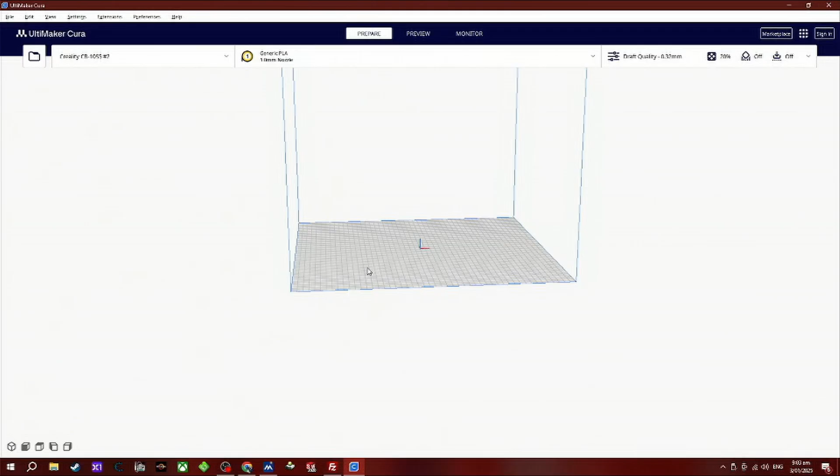So load up Ultimaker Cura. If you use the center mouse button or the scroll button, you can zoom in and out. If you hold down the left button, you can change the view or drag it. So first we're going to import one of our STL files that we had saved, or one of our parts. I'm going to drop in the left side for now.

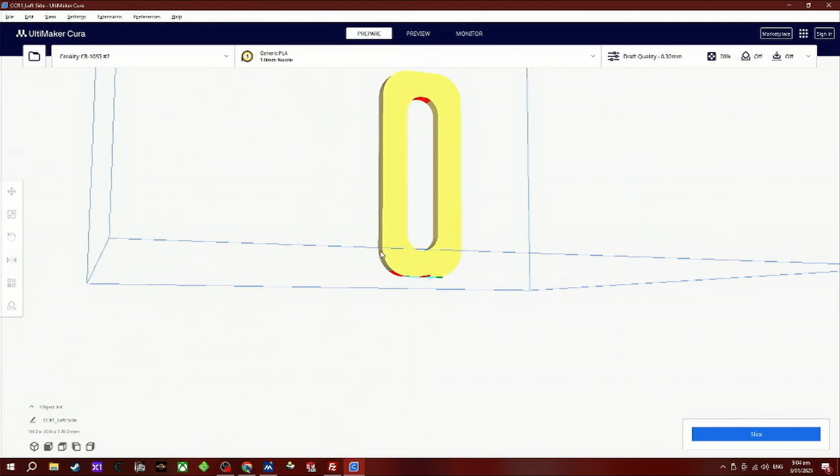So if you click on the object, usually if there's only one thing going in there, it will center it for you. If you click on it on the left hand side, you can see this has come up. This here shows you where it is on the grid or on the heated bed. If I change the numbers, you can see the object will move. This is in the plus.

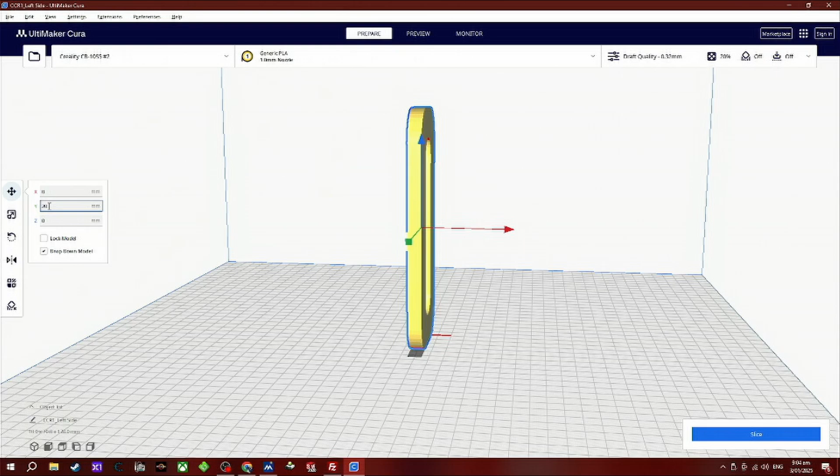If I was to add negative and then put the number after it, like let's just say minus 20, it'll move the other way. Or you can just grab the arrows that you can see there, the X, Y and Z, the red, green and blue ones. Click on the left mouse button and hold it and lift it up, or move it left or right.

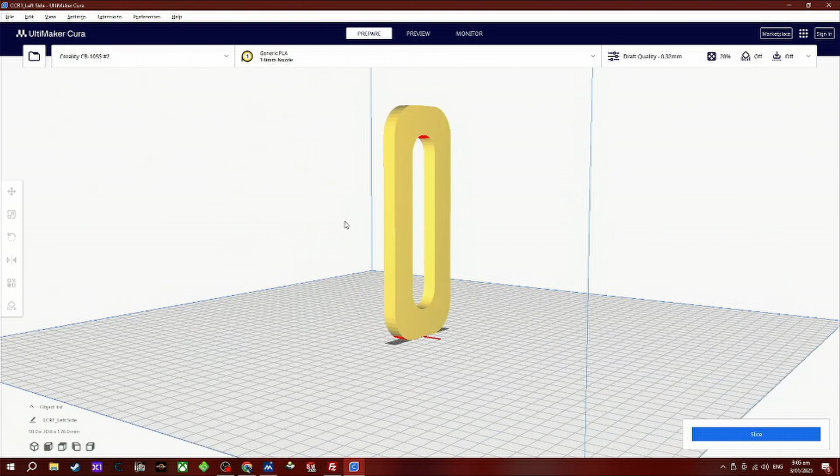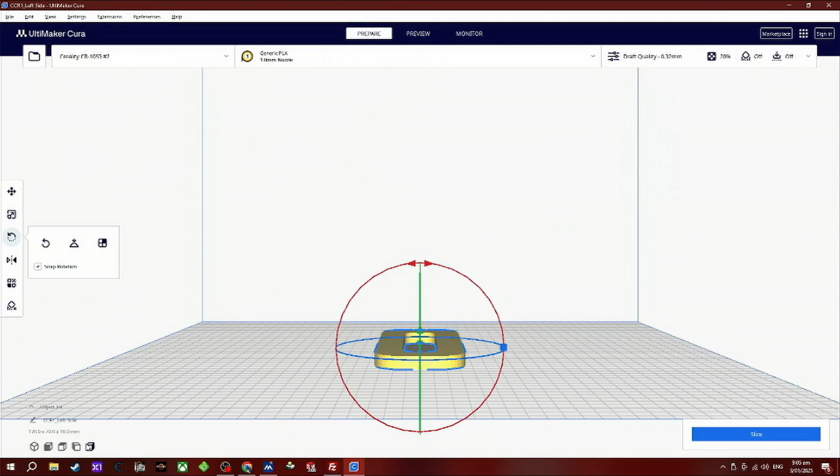So this third one here, you can actually manipulate the object and turn it, as you can see there. So same thing, just click on it and hold it and move it around to your desired angle. You can use this to change the camera, so you've got front view, top view, and then you've got the left and then the right sides. I'm going to click on the top view, and you can see I can move it.

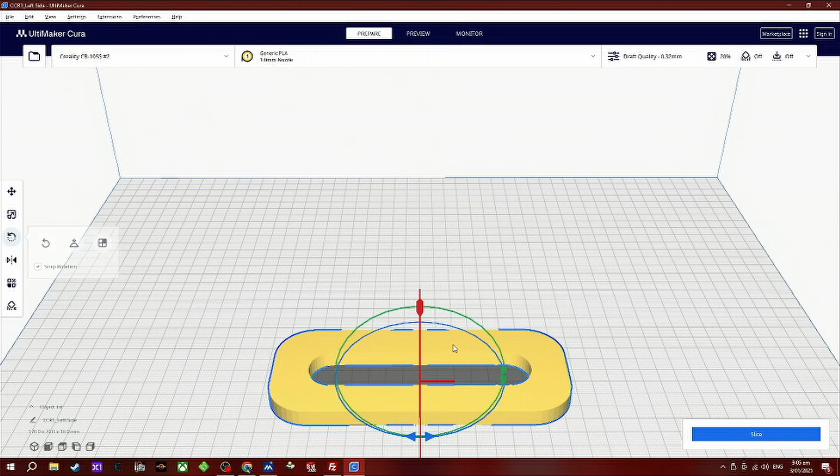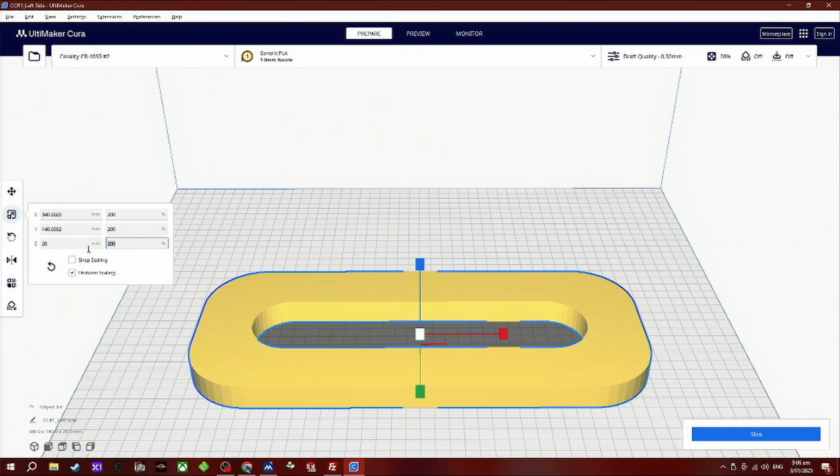If you click off the object, it removes that panel. So now I'm going to click on it again. I'm going to go to the second one. The second one is the scale, or the size, the height, width and all that. If you want to double this, just leave the settings as they are. Now I'm going to double it in size, make it 200, and it will move accordingly. If you untick that, it will obviously only increase the Z height, and it will leave everything else the same.

If you want to change the nozzle diameter or the material, you can go here. I'm printing in PLA at the moment. So go in there to change the nozzle diameter. I'm not going to change it because this is what I'm going to be printing in, 1.0. You can see down in the right hand corner, we're going to click on slice. You can actually set this up to do it automatically. And as you can see here, it gives you how long, what the weight is and everything else, or how many meters you're going to use.

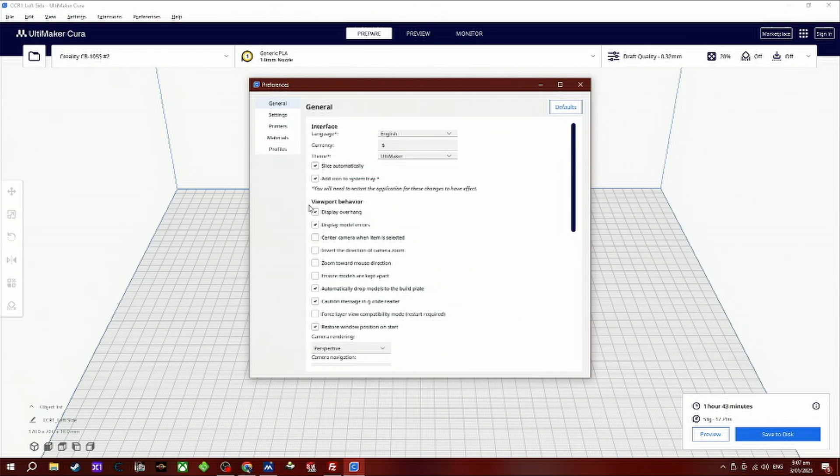This one here, we can actually select what material we're using, and also we can add in the cost per roll. So if you've got a 1 kg roll, which is somewhere around 330 meters, we can type in what we've paid, and I always put in what it costs to ship as well, so I put in the total amount. So there I put in 1000 grams, so that's 1 kg, and up there I'm going to put in the amount of what the roll cost me.

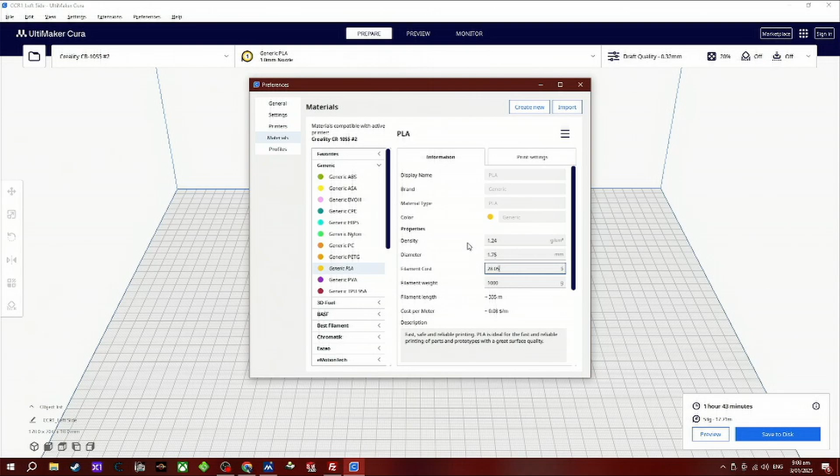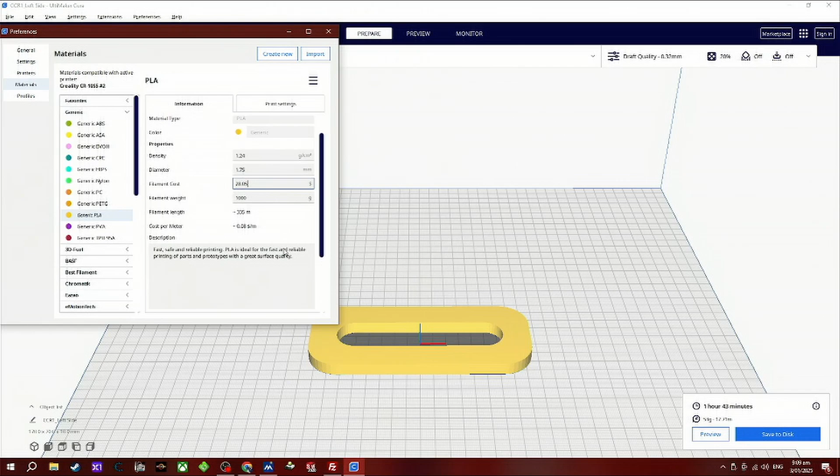Reason why this is done, let's just say if you're running a small business and you want to know the cost of each part that you are creating, this will give you a fair idea. So it just divides it up. Once you hit the X on the window there, it will pop up on the bottom right hand corner right there. So there's the cost of the part.

So here I'm going to click on this, and this will bring a drop down where we can do all the settings here. The quality, I'm just going to leave it as it is. Then we've got the walls, I'm going to leave them the same as well. I'm going to change the infill to 5%. If you were to make this 100%, this object would be one solid piece. If you make it 5%, it'll make it really, really light. That is the difference.

Next is material. I'm going to keep the hot end at 200 degrees, but the bed is going to be changed to 0 for me because my heated bed is actually independent from the printer. You will just leave this as it is, unless you have an individual heated bed that is not connected to the software or to the actual console of the printer. Now the print speed, I'm going to change that to 100.

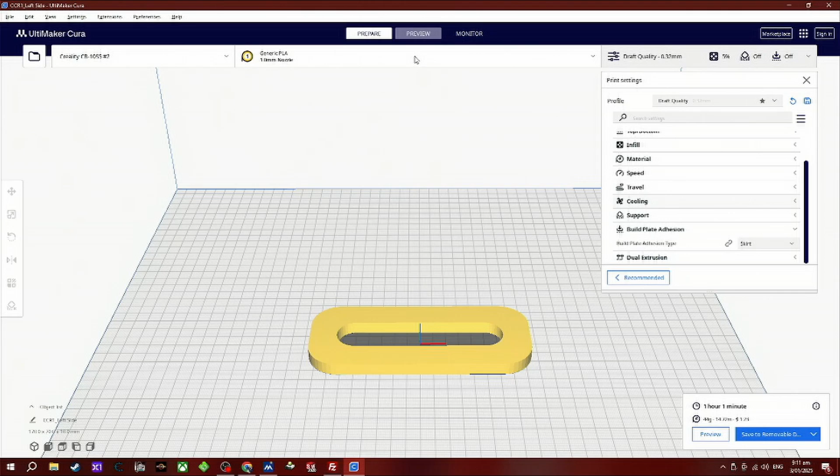Build plate adhesion, I will give you a demonstration on what this means. If you click on this here, this will show you what it will look like when it's being printed. It's more a demo. So if I zoom in on that, you can see there it has a skirt, which is a total waste of time printing. To be honest, because I've been doing this for so long, I usually either select brim or I turn it off, or have nothing at all.

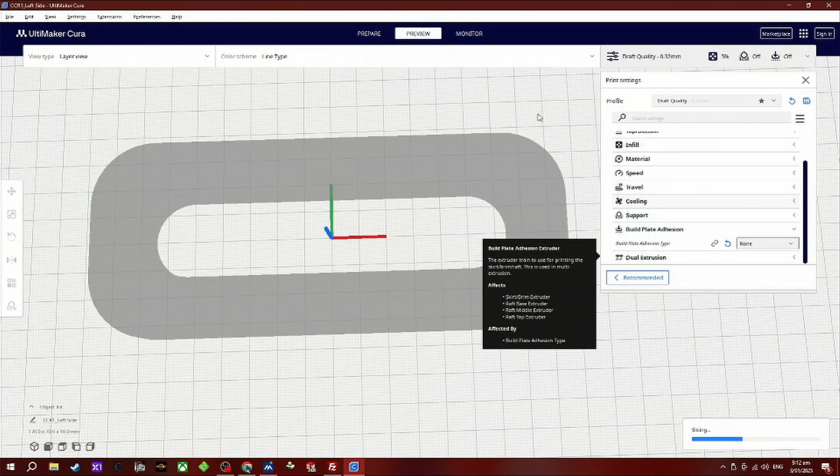So if you have it on brim, this will help the actual part stick to your build plate a lot better. It will have more grip or more space to hold on to. So you can turn it off here and just print the actual part. But there's a downfall to this: if your bed isn't level, your part's not going to stick and it will just come off. So keep that in mind.

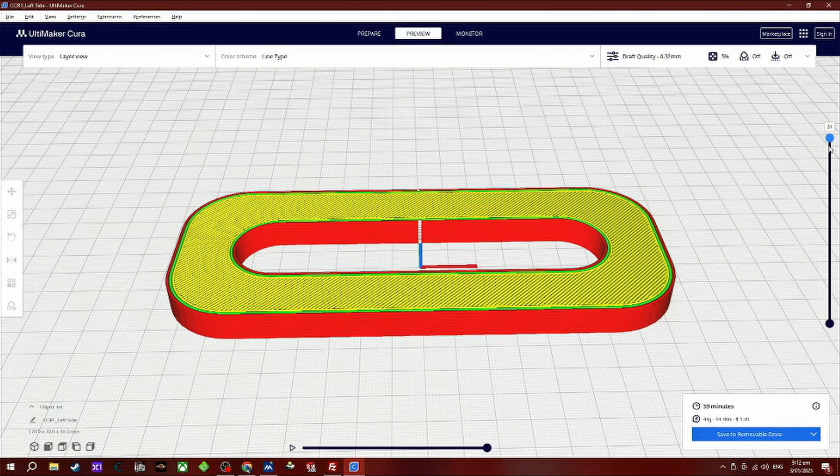Worst case scenario, one of the corners will lift and then your print will be ruined. So this setting here on the right hand side will show you how each layer is printed. You can only see this in preview mode. The one down the bottom here, if you push the play button, it will show you how or which direction the nozzle will print.

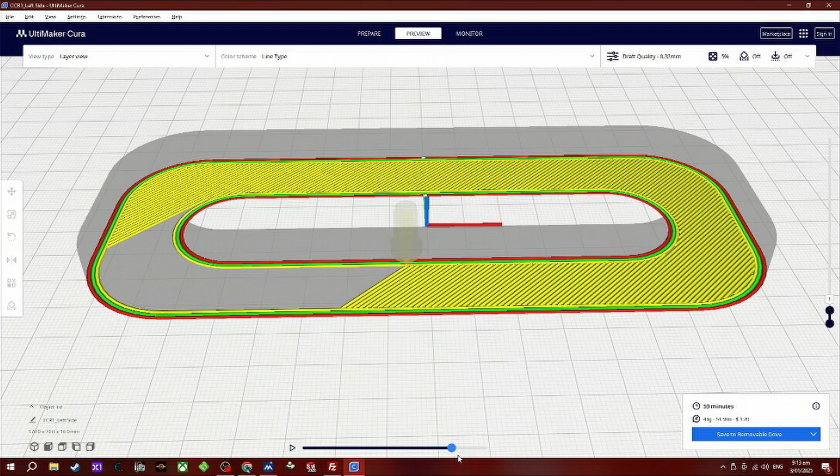If you grab the slider with your mouse and drag it over, you can fast forward it. As you can see there, you can see how it builds the first layer.

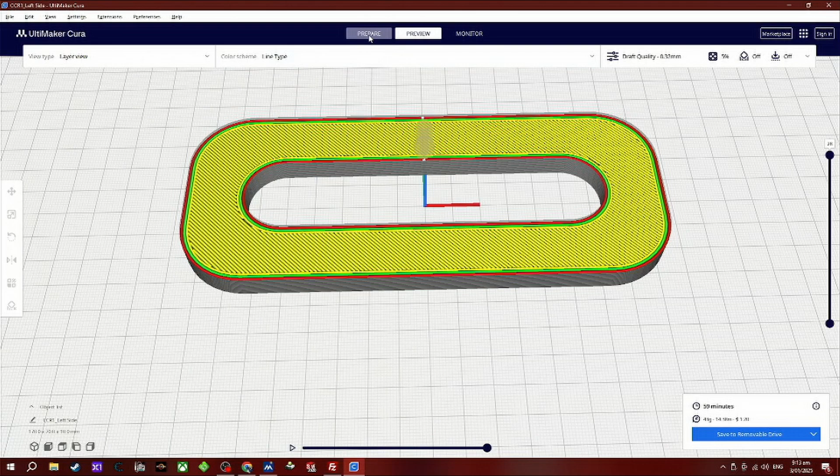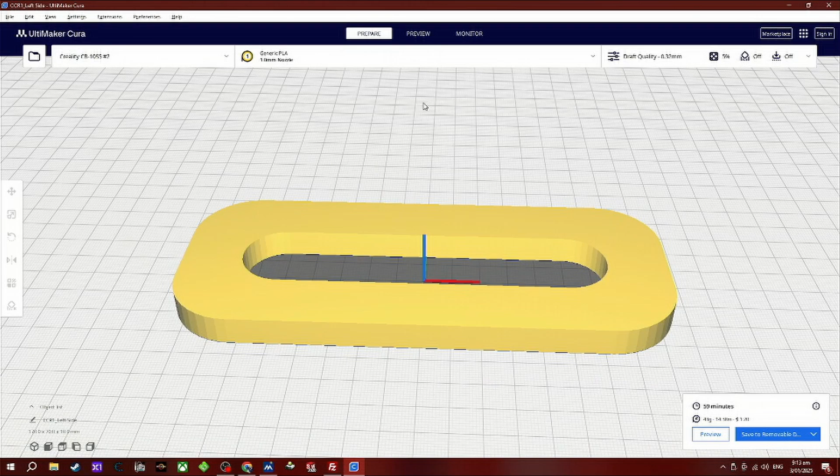So this here monitor, this monitors the printer in real time. So if you connect to your printer using a USB device or Wi-Fi, you'll be able to adjust the settings here. There are different methods in order to save your part to be printed. You can use the USB method, which is what I use, or Wi-Fi. I use Octoprint, or you can insert a micro SD card and save it to that and insert it into your machine.

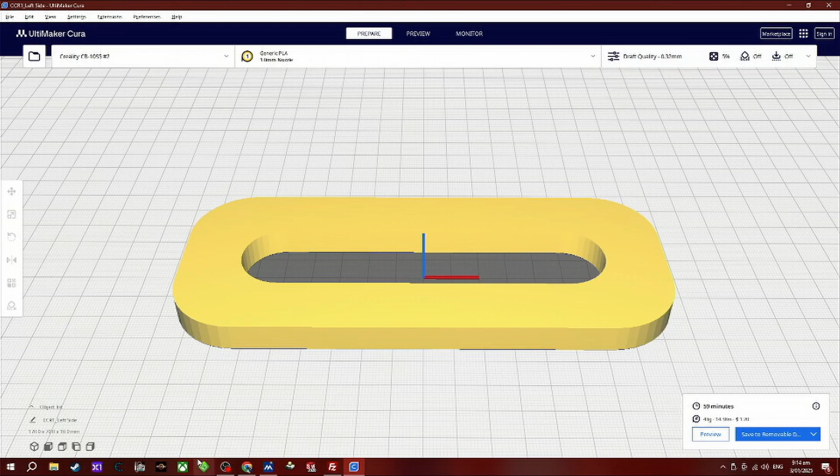Like I was saying, there's different ways of doing this. I usually use the SD card method, and the reason why is because if I'm connected through Wi-Fi and something happens, my printer will stop, or if someone pulls out the USB cord, the printer will stop. So I use that method.

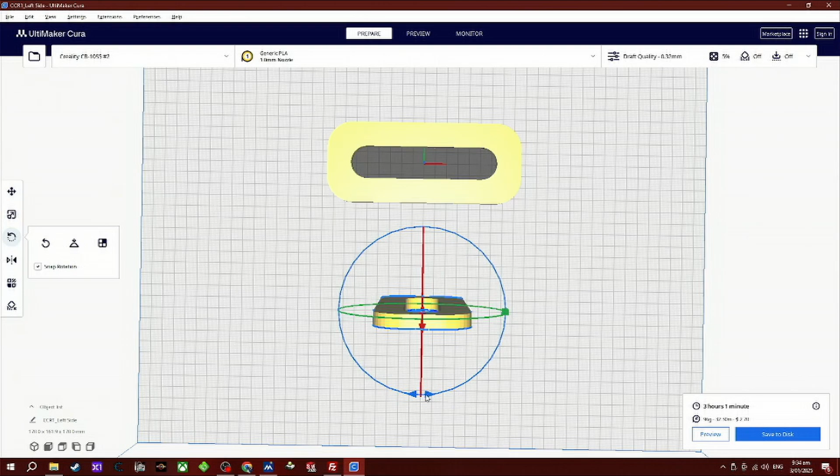So I'm going to import another object or another part or the opposite side. So we can manipulate this by clicking on it and going to the first part and moving it around. I'm going to flip it over. This is just to demonstrate how this works. It's pretty straightforward. As you drop it down to the build plate, it will reslice it for you.

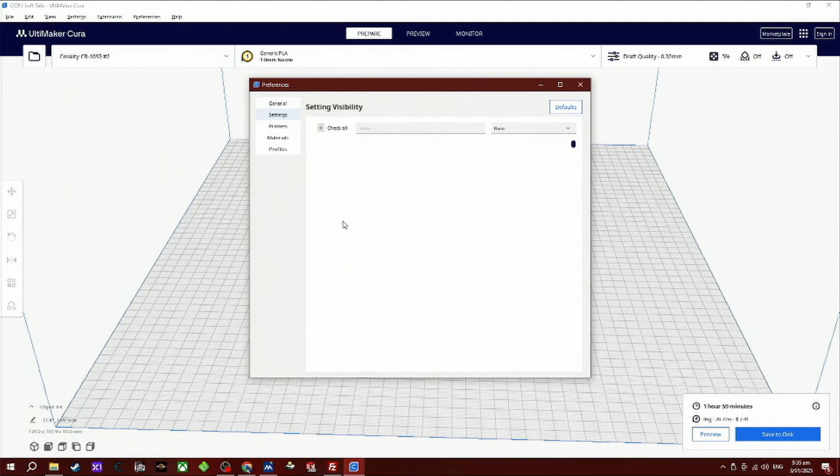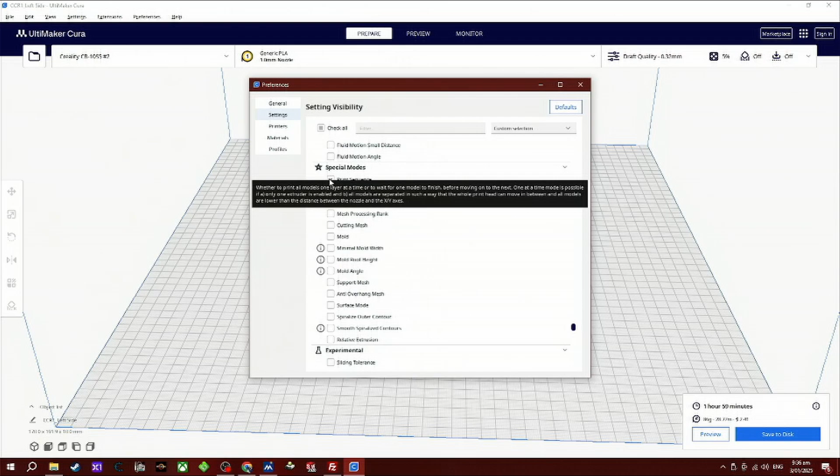I'm going to head over to the settings as there is a tab missing, and that tab is called special modes. You need to go to settings and scroll all the way down the bottom, and you need to hit the tick button in order to add it to the menu. There it is there. You need to hit the tick button and then hit the X button on the window and it will automatically save it.

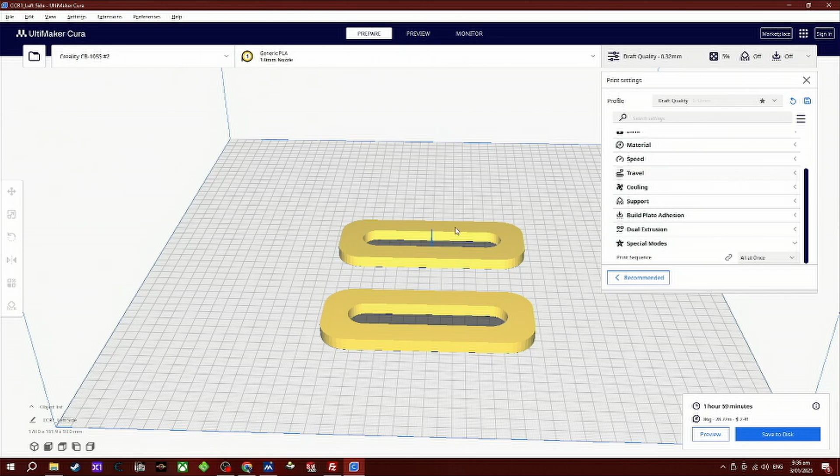If we scroll down, there is the special modes feature. So if we click on that, the reason why I want to add this is because I want to print these one at a time, not all at once, because if you select all at once it will go backwards and forwards.

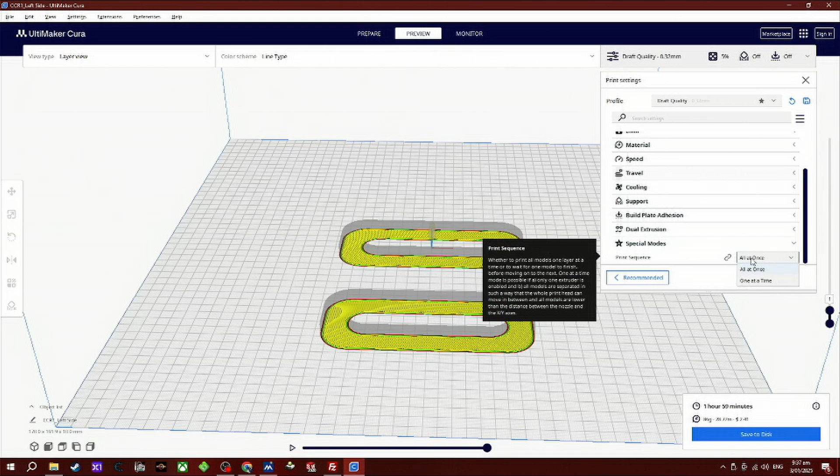I will show you this in the preview. As you can see here, I push play, it'll do that layer there, and then it'll jump over to the other side, and then it'll jump back to the first one, and this causes webbing and it's really annoying and it's a lot of mess to clean up. So if you print one at a time, you're good to go.

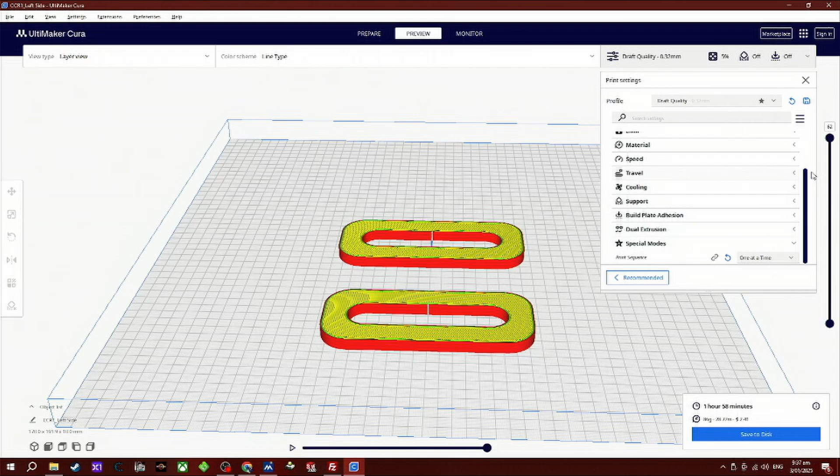But also saying that, you need to adjust the gantry height. A lot of you don't know what that is. So the gantry will print one object, and if it doesn't lift up high enough, it will knock over the other one. So keep that in mind. And we can adjust this by going to the settings.

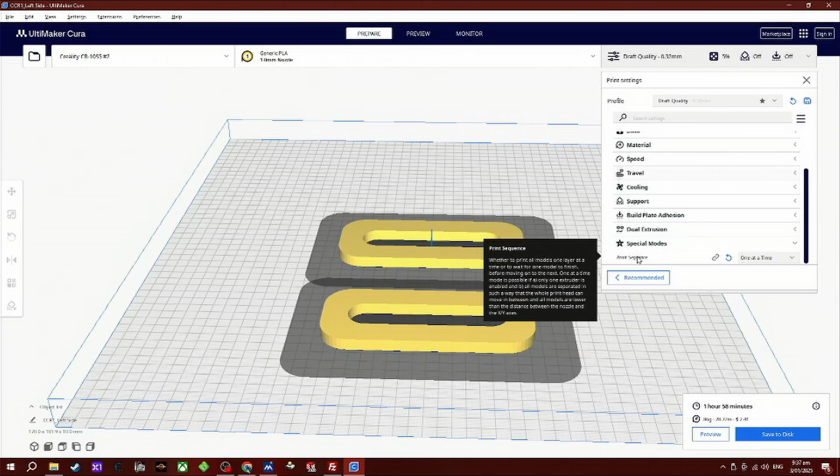I'm going to go back to the prepare mode, and you need to space these. As you can see, the shadow, you need to divide these and make sure they are not touching, otherwise it won't print. It should look like that. So if you have multiples of parts on that bed, it must look like that.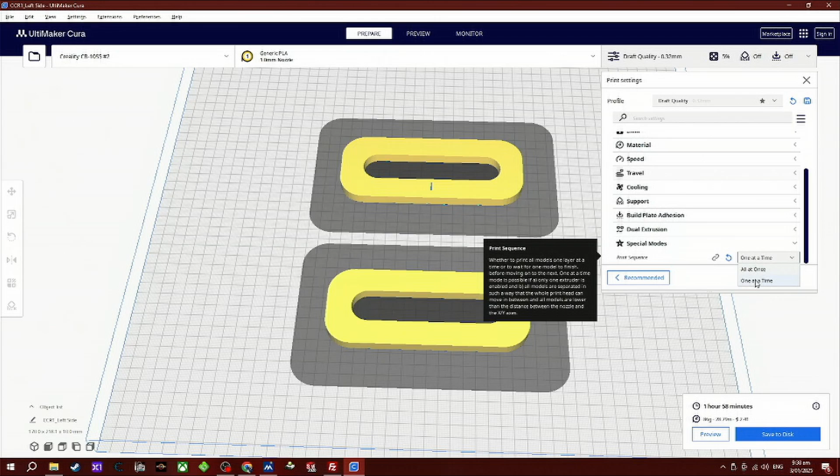So I have selected one at a time here, and as you can see, it's still come up with the error message. So we're going to go into the settings again and change it.

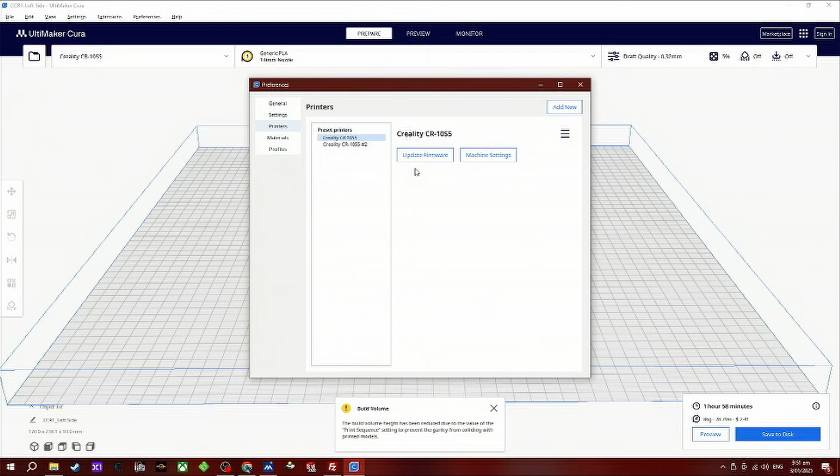Now we need to go into the printer settings or manage printers and go to machine settings, and then we need to go to the right hand side to where it says gantry height and change it. I'm going to change mine to 150, so this gives it plenty of height. As you can see here, you can see the gantry around the outer edges there. It jumped up after we typed it in.

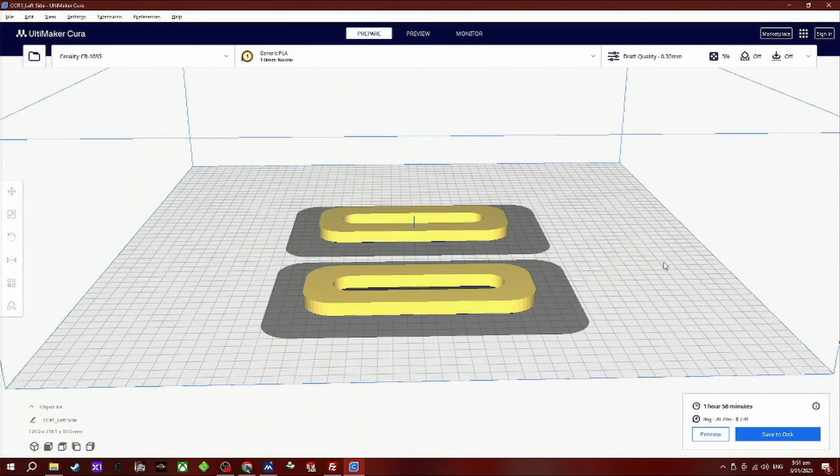If I go down to print one at a time, it'll come up with the error message again. Just ignore it because we know we've changed it.

That's it for this guide. This was a basic setup to get you up and running. It wasn't an in-depth guide on every setting. There are so many different ways to set up your printer, and with Cura, there's literally hundreds. Obviously there's so many different printers out there, different methods, different ways. This is just how I set up my way of doing things, because it's simple, it's quick, and it's easy, and it just gets you up and running.